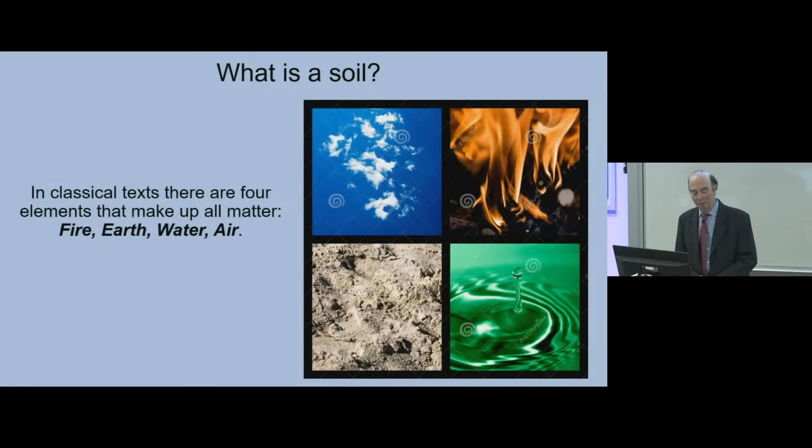In classic texts, there are four elements that make up all matter: fire, earth, water, and air. Fire: igneous rocks come from magma. Igneous is derived from the Latin word ignis, for fire. Magma is an ancient Greek word for thick unguent or paste. And ash is the remains of matter after fire — particularly relevant to mention today on Ash Wednesday.

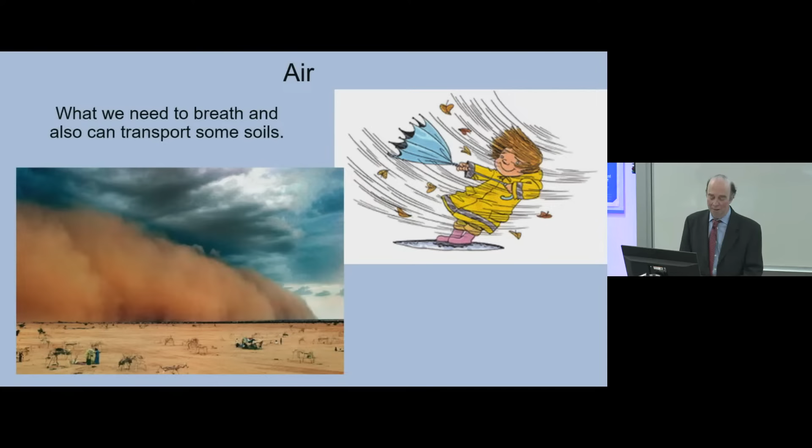Water: this is what we need to sustain us, and which can also weather and transport soils. Air: this is what we need to breathe, and it can also weather and transport the lighter soils. And the earth is the solid remains from the weathering of rocks and of ash in particular — many of our active clays come from the weathering of ash. So soils are derived from fire with the help of water and air.

Soils are particulate and potentially comprise three of the classical elements: earth, water, and air. This makes them very different to many civil engineering materials. Also, soils have three phases rather than just one. Two of these phases, the water and the air, readily intermix with each other, so understanding their behavior is challenging.

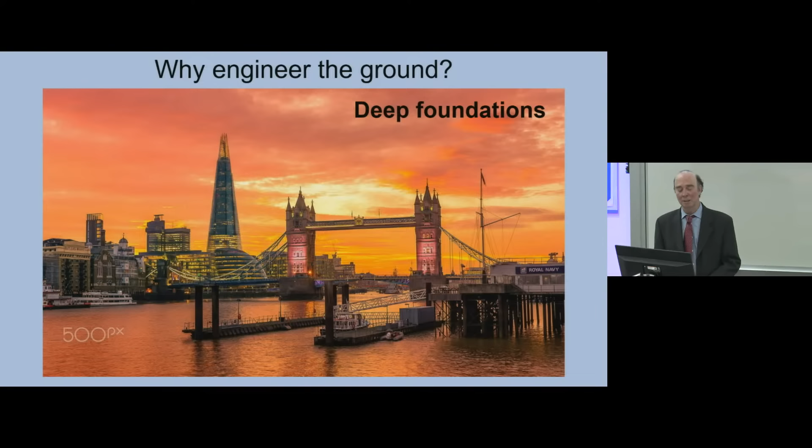Why engineer the ground? Here we see the Shard, Tower Bridge, the Tower Bridge piers, and a berthing jetty. They all sit on piles. For the Shard, they sit on very deep bored piles extending down to the Thanet Sands. The Tower Bridge piers probably sit on timber piles, and then we see these steel tubular piles driven in. We need to think about what capacity they need to take, how much they're going to move, etc.

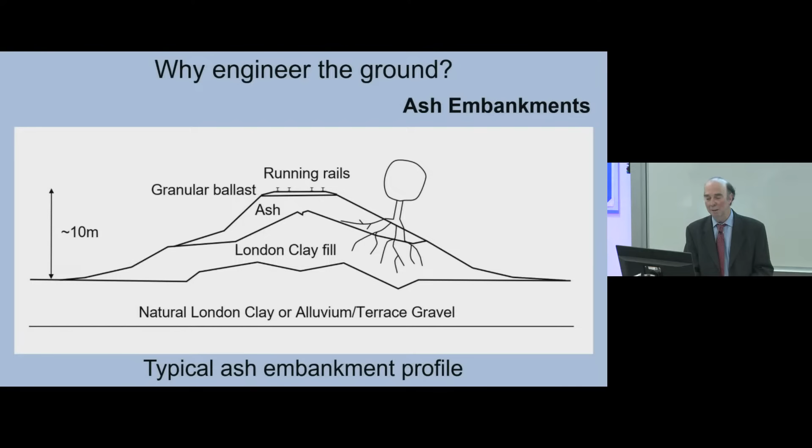One way used to remedy this, to keep the alignment - you don't want things moving if you've got trains running on them - was to top them up with locomotive ash. It's light, it's a waste material, and it's got good frictional properties, and it's free draining. I'll talk a bit more about that later.

Moving on to tailings dams, I was very fortunate to be part of a team with my eminent colleagues Michele Jamiolkowski, Kaare Høeg, and David Carrier, and before that Dick Chandler was there also. This is a picture of the dam that we worked on, the Żelazny Most Dam in Poland. It's 14 kilometers around its circumference, enormous, and about 70 meters high in places.

I very much enjoyed this work. I learned a lot from it, particularly with the interaction of my colleagues from Geoteco and KGHM, the mine people, and you see us here. Here we're about to descend about a kilometre from where the ore is extracted, and the photograph obviously taken from about a kilometre above. And then tunnelling.

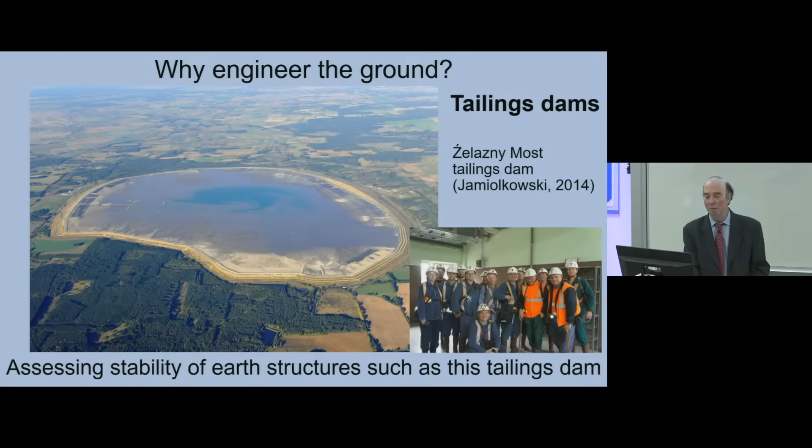And we continue actually with the piling theme. One of my current researchers, Clive Appleyard, is looking at the piles that were intercepted and cut into at the Bank Station upgrade.

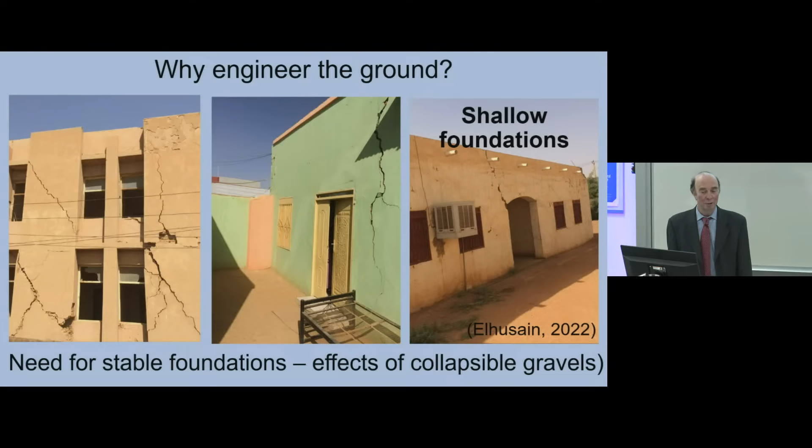Moving now to shallow foundations, equally important. You can see the damage that's been done to these structures. These structures are in an area close to Khartoum in Sudan, and my researcher, Dr. Louay Elhusain, did research looking at collapsible gravels. A few years earlier than that, Dr. Khalid Al-Haj, who I'm very pleased to see here also, did work on another Sudanese troublesome soil, a very expansive soil.

This is one of the deepest excavations in London. These are the running tunnels that went past and open up to station tunnels. All of this had to be done without excessive movements on Big Ben. It's a fantastic engineering feat.

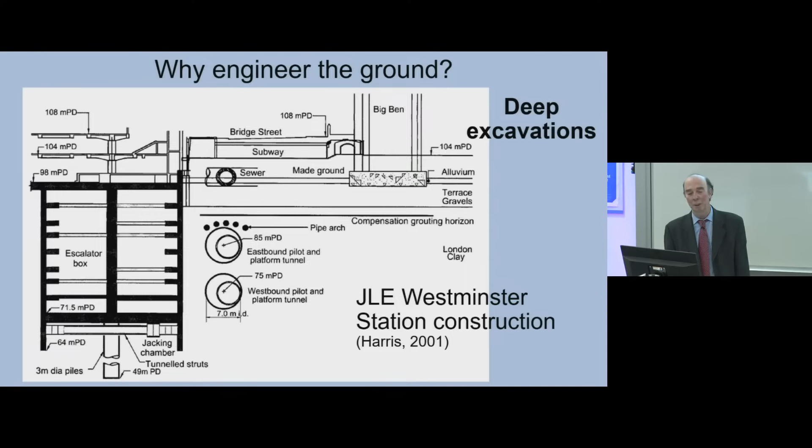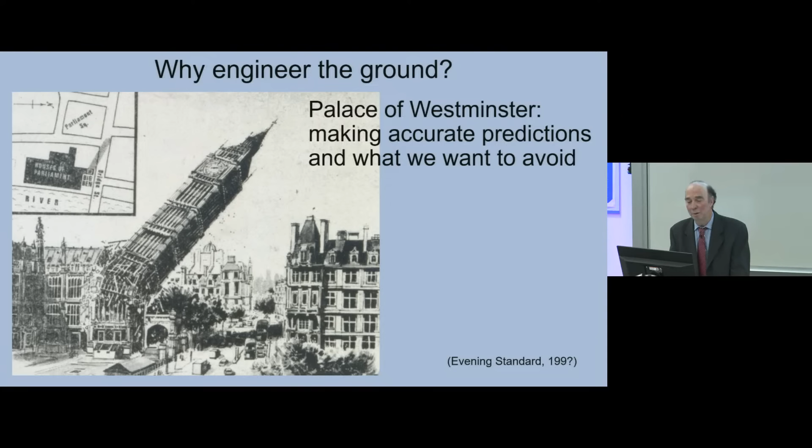This prediction was actually made by people at the Evening Standard, who clearly hadn't been on our MSc course.

So what do we need to think about? Well, in order to engineer the ground, we need to understand the materials that we're dealing with. We need to obtain an idea of what's in the ground through geological records and in situ investigations. And characterization often starts in the lab.

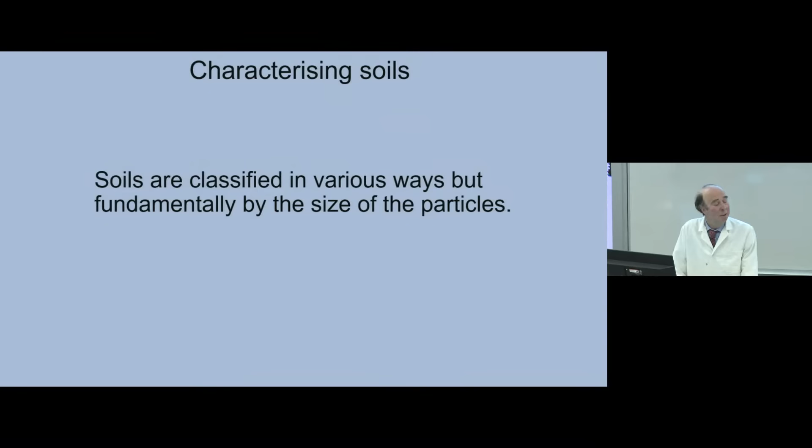And this is more my modus operandi, really. Soils are classified in various ways, but fundamentally by the size of the particles. What we've got lined up along the front here are nine beakers with these different materials in them. At the far end, on your right-hand side, we've got the coarse gravel, just one big lump. Gravel's in these - coarse, medium, fine. Then we've got the sands - coarse, medium, fine. We've got one silt, and we've got kaolin and montmorillonite.

They've got exactly the same mass - each of them has 100 grams of material in. And what you can see straight away is that some of them have completely different volumes to others.

So we see here, for example, the sands and the gravels all have roughly similar volume. By the way, I didn't measure them and estimate them in these beakers—I did measure them using a measuring cylinder beforehand.

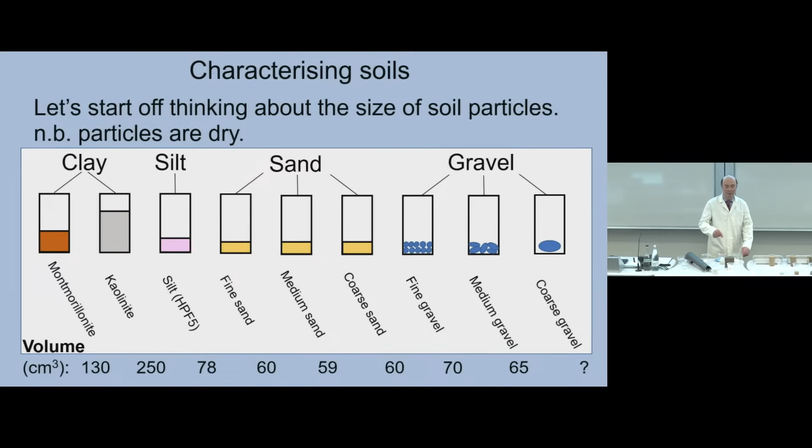The silt is a bit higher, but then we look at the kaolinite and the montmorillonite. Why are these bulking up so much? These materials are clay minerals and they have a net negative charge, so they're controlled by electrostatic forces rather than gravitational.

So all of these, you can definitely hear a granular sound—I won't do it with that one. And you might ask, why this one? This one actually is less active than this, and it's just to do with the grinding process.

So we've got these we would refer to as colloidal, and these we refer to as gravitational. The silt is somewhere in between—this particular silt probably on the gravitational side.

What do these fine materials look like? Well, we've got kaolinite and montmorillonite here, 10 microns here and 1 micron here. These are very small particles. Can you see the pointer? So often with these, we're talking about scales down to about 10 nanometers.

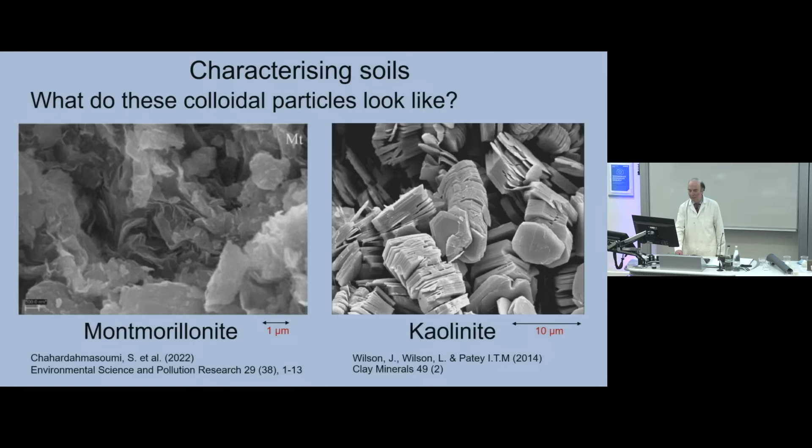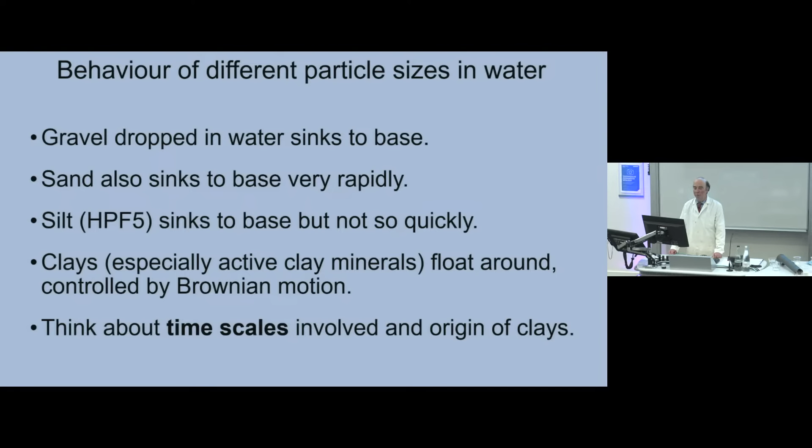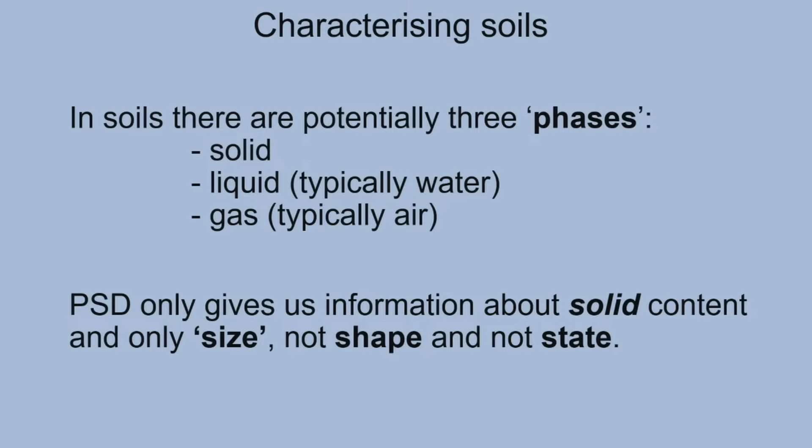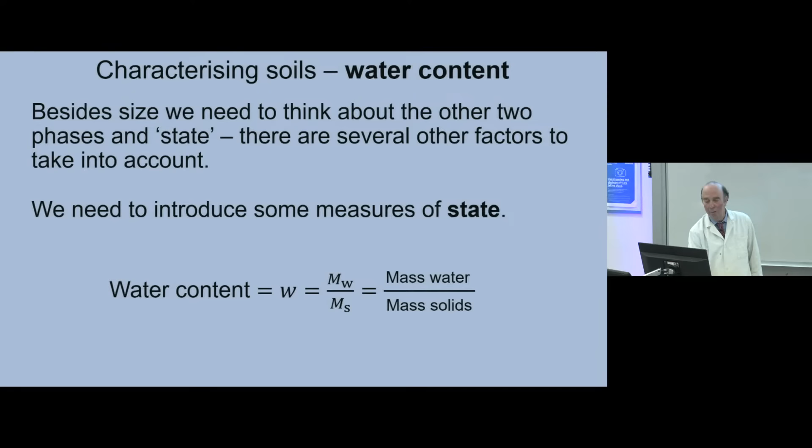There are several other factors to take into account, so we need to introduce some measures of state. The first one, perhaps the most fundamental, is water content—it's the mass of water over the mass of solids.

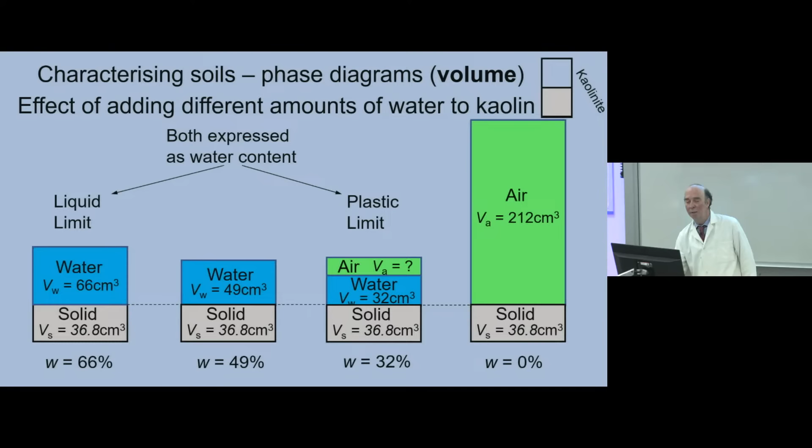These water contents are particularly chosen because they represent the liquid limit—if we wet it up any more, it essentially becomes a liquid—and the plastic limit—if you dry it out any further, the soil starts to crack and fall apart. What I've done is prepared 3 samples at those 3 water contents.

So here I've got the liquid limit—it's a bit like a yogurt. This one, dare I take it out... that's at the plastic limit, so you can just about shape it, and it's certainly got some air in it. And this one is quite sticky.

So 3 really quite different consistencies. This one has got some stiffness to it. This one has probably got very little strength, and the one in the middle is somewhere between.

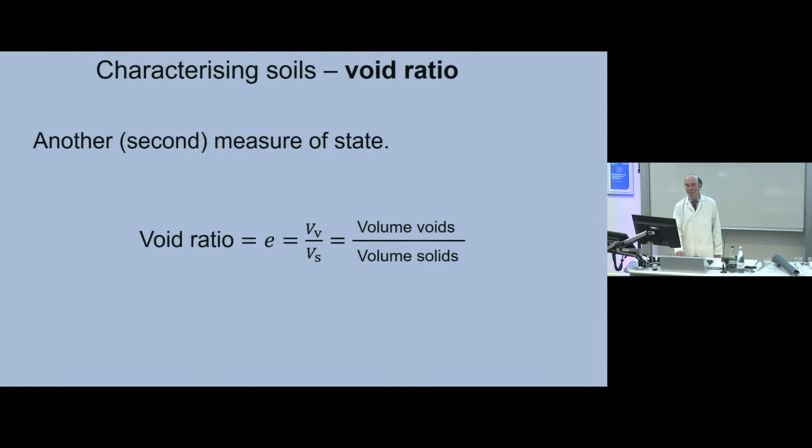Another measure of state is the void ratio, the volume of voids to the volume of solids. Here we again can see the differences. All of the sands and gravels have very similar void ratios, roughly. The silt's a bit higher, but then we come back to these two: the kaolin has 5 times more air than solids, and the montmorillonite about 2.5.

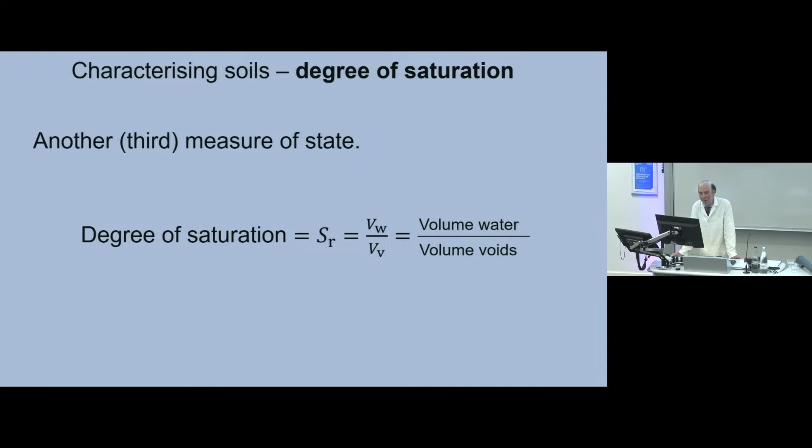Let's think about what happens as the soil dries out from a fully saturated state. We'll start at 100% and observe what happens as it reduces. The behavior of the granular and the colloidal is completely different, so let's look at them individually.

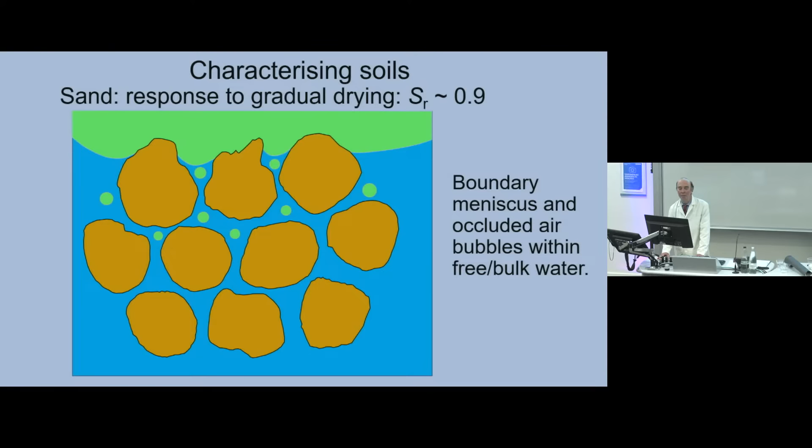Here we've got fully saturated sand particles, degree of saturation 1, and then as we start to dry it, we get a meniscus pulling in on the surface, and small occluded bubbles starting to come in. If we continue further, the meniscus pulls in further and the bubbles start joining up and coalescing, eventually sufficiently so that we've got continuous air phases and continuous water phases.

Eventually, the water dries out such that we've only got meniscus water and continuous air. If we dry further, we'll note that's at about a degree of saturation of 0.2 roughly. And then if we dry it out fully, in the case of a sand, it would dry to 0.

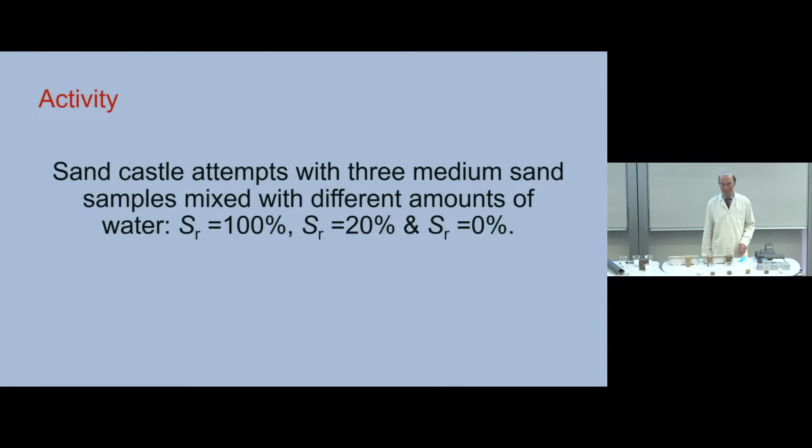So let's now have a look at the differences of these water contents and degrees of saturation. We've got three of the medium sands here: 100%, 20%, and dry. I hope these haven't dried out since I've mixed them up—there's always a risk. Let's try the fully saturated one first.

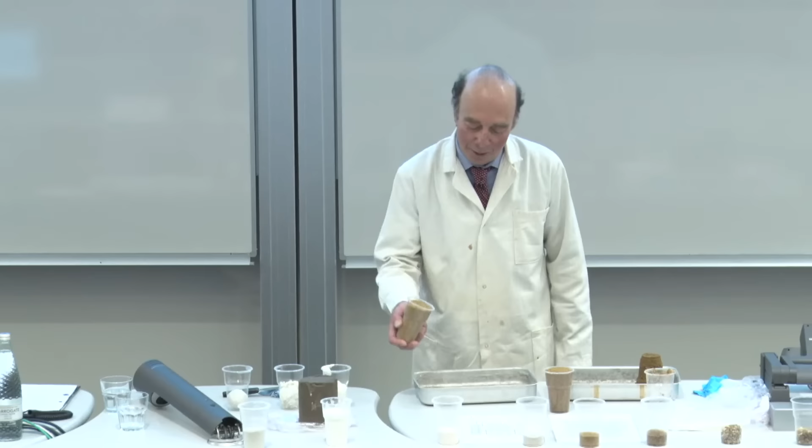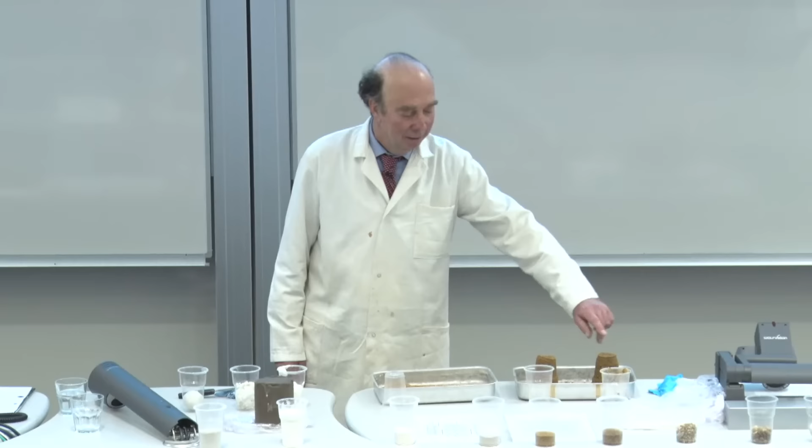Well, that one must have dried out a little bit, okay. Let's now try the dry one. Hopefully this one will be all right. That one, we've got a very poor heap, which reflects the angle of repose. And this was the one I was expecting to be more like that—it is, it's a better sandcastle, you've got to agree. But we see the difference, completely different. This, I would expect to slump a bit more, but there you go.

Let's move on to clays. So starting off with a fully saturated clay, the first thing to say with clay is that if we put the clay in water, because it has this net negative charge, it attracts cations from the surrounding water.

You have what we refer to as an adsorbed layer of water, right next to the surface of the particle, trying to counter this net negative valency. And then there's an absorbed water layer that you can't fully attract—there's not enough space on the particle surfaces to fully attract it. So we have these different types of water.

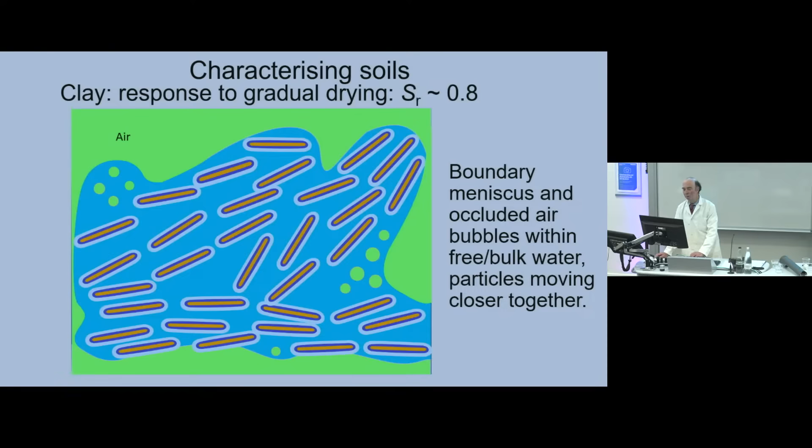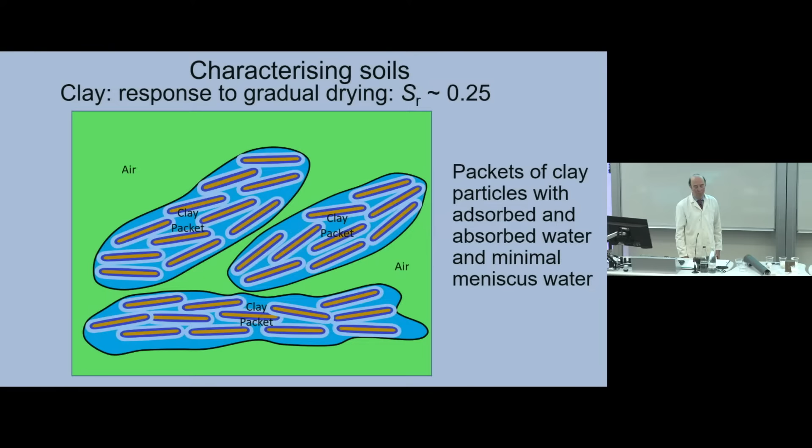Again, as it starts to dry, we get some occluded bubbles, but at much higher water contents. The boundary meniscus moves in, and the particles start grouping together to some degree, forming clay packets. Eventually, we have clay packets surrounded by and held together with menisci, and eventually the menisci go—so we've lost most of the bulk water. You can see we can't dry these out completely because that adsorbed water is held quite tightly by the clay particle charge.

So our phase diagrams actually take a series of steps as we desaturate here. In the case of clays, it's actually much more complicated. Usually we just express them with this simple diagram: air, water, and solid. But when we've got clays, we've got adsorbed, absorbed, as well as potentially meniscus water. And this is very significant.

If we compress this, so we squash the water out of it, eventually we squeeze out most of the bulk water, and we might start then impinging on that absorbed water. It also has very important implications if the water has any salinity in it. So, a former researcher, Dr...

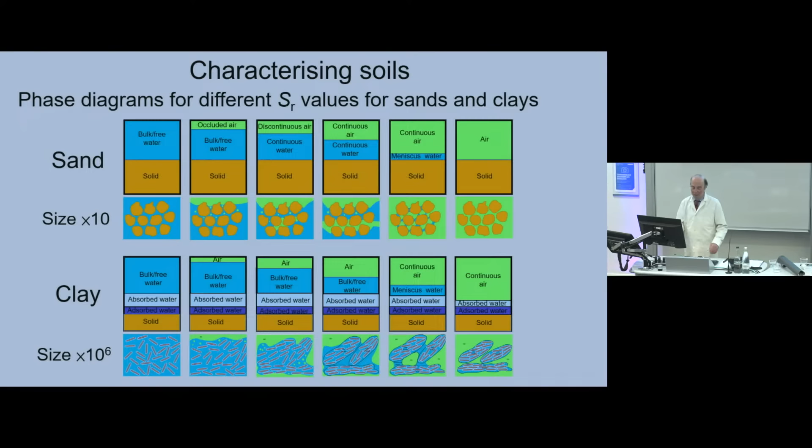Hendarto looked at water extraction in Jakarta, Indonesia. As the water was extracted, the water table came down over decades, and seawater started to come in. That salt water provided the cations that were needed. So the adsorbed water reduced, the void ratio reduced, but because there was more bulk water, the permeability increased - completely counterintuitive to start with.

So we've looked at some fundamental characteristics on a wide range of soils and the effects of air and water on them. How are these characteristics and states reflected in what we observe in the ground? The characteristics often remain the same, but the states vary enormously depending on the history of the soil.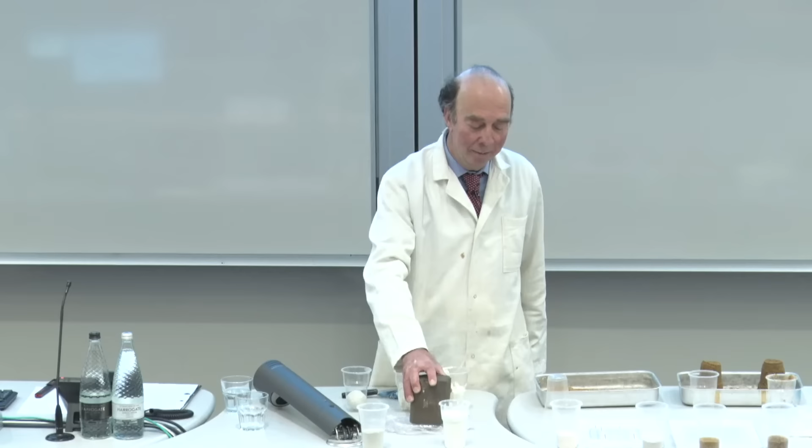Let's consider the London Clay Formation. Everyone knows I had to mention London Clay, didn't I? So this is a piece of London Clay, and it doesn't look anything like any of these. It's much denser, it's stiff - I can just about get my fingernail into it. And why is it so different?

Well, this material was formed about 55 million years ago. This is a slide from Dr. Chris King, who I was greatly privileged to work with on several occasions, along with Dr. Jackie Skipper. Chris did a phenomenal amount of work on the London Clay that many of us were not aware of until much later after he'd done it. This is work from the 1980s. At this time, 55 million years ago, a large part of southeast England was covered by the London Clay Sea, but the important thing is the shoreline was transgressing and regressing, so you get different depths of water.

Typically, these soils have a coarsening upwards gradient. We call this sequence stratigraphy. So Chris looked at the sequence stratigraphy, and he came up with 5 divisions, which are still used today, within the London Clay, which have quite different characteristics.

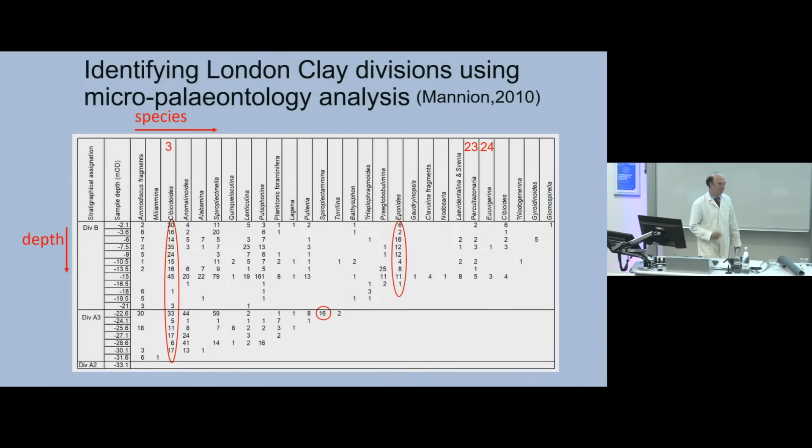The other way that he classified them was through the use of micropaleontology. You can see here a list of mostly unpronounceable names, varying with depth. Some of these little creatures, these microfauna, lived at different times and are evident at different depths. So here, this Cibicidoides existed through all of division B and A3, whereas this one - I'm not going to try and pronounce it - only occurred at that one time.

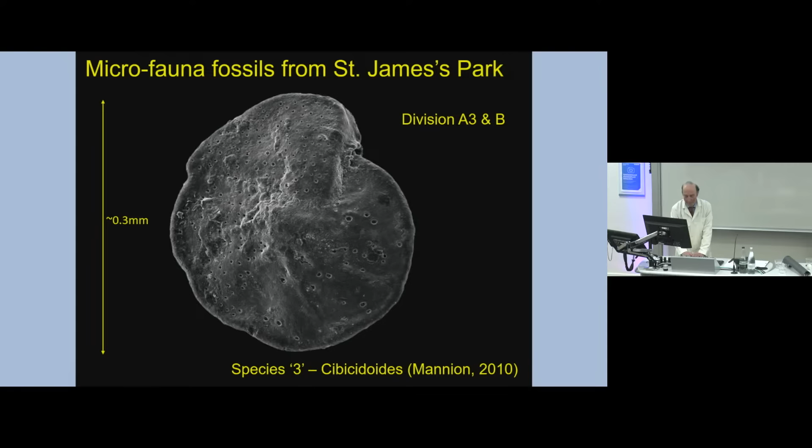So this is the Cibicidoides one, the one that pops up everywhere - looks like a bit of rotten pancake from yesterday, doesn't it really? This one, I'm not going to try and pronounce, but just to show you what it looks like - it just amazes me that you can find things like that in a lump like this.

This is Will Mannion's work, along with Dr. Mike de Freitas - very happy to see you here tonight, Mike. And this is another one - again, I'm not going to try and pronounce it, and I might cause some offence if I try, I think.

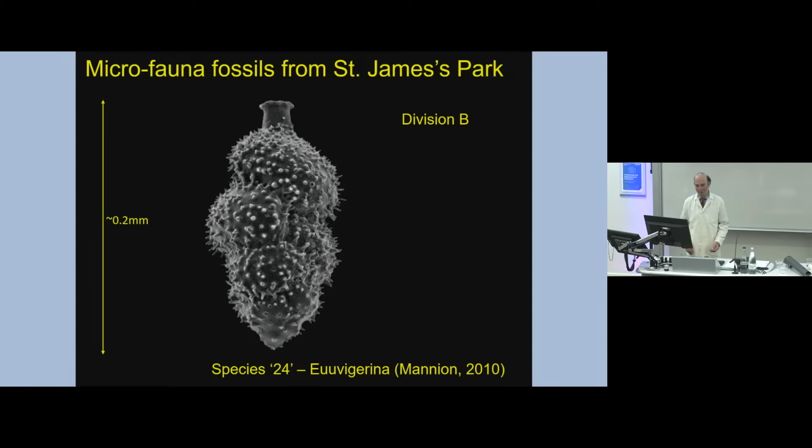So we talked about the 4 elements. Besides the 4 elements, we have a 5th one that is often the case in soil mechanics - that's the element of time. So let's investigate some in situ soil states and also how the ground responds to engineering activities. Let's go on to field characterization and monitoring.

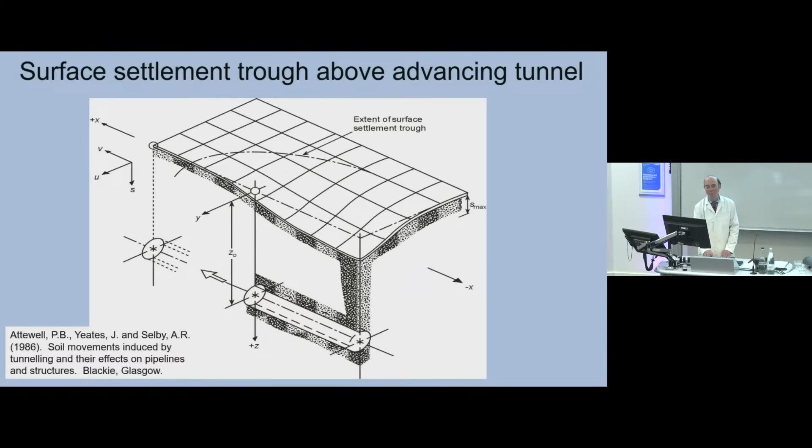Right. Many of you will probably recognise me in this attire, so we need to get ready now.

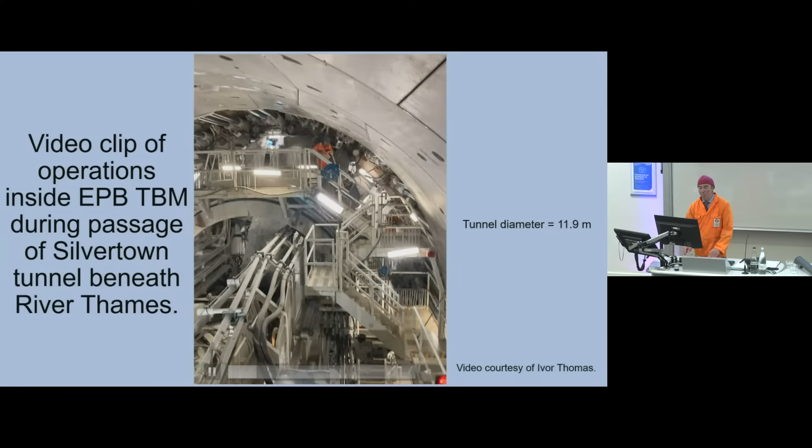So you saw the clip, thank you very much Ivor, of a TBM. Let me talk through it briefly. Here you can see the spoil coming out, swiveling around. This is the Archimedes screw where the spoil comes from. You can see the lining, looks beautifully constructed. You can get a feel for the scale of the thing. The cutter head is hidden in the front here, and all of this, including the lining erection, is being controlled by a very small number of people.

Right, I want to start off at St James's Park. This is one of the sites we used as a control for the Jubilee Line extension works. This is work from Dr. Rob Nyren, and Rob, I think you're listening in - you'll be amazed at how often your name gets mentioned.

The driller who installed the instruments - I bumped into him a few years later and he said, 'Oh, what happened at St James's Park?' And I said, we got 20 mil of movement. He said, 'God, I could have done that with my heel.'

But the significant thing about this is that the volume loss was 3.3%. Now, that number may not mean much, but all the calculations for predicting how much the ground would move assumed it would be 2% at the maximum. So this was a significant excess over that, and we also noticed we had these very large volume losses.

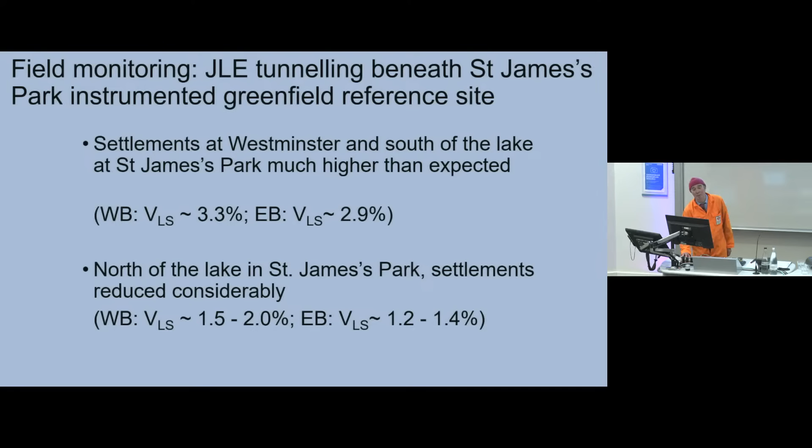This is for the first tunnel, this is for the second. But north of the lake, they were much more what we would expect. As a consequence, and to try to get a better understanding, we drilled 5 sets of boreholes to look into this. We knew the tunnelling had some influence based on how they were operating, but we wanted to check the ground conditions. So here's our St James's Park site.

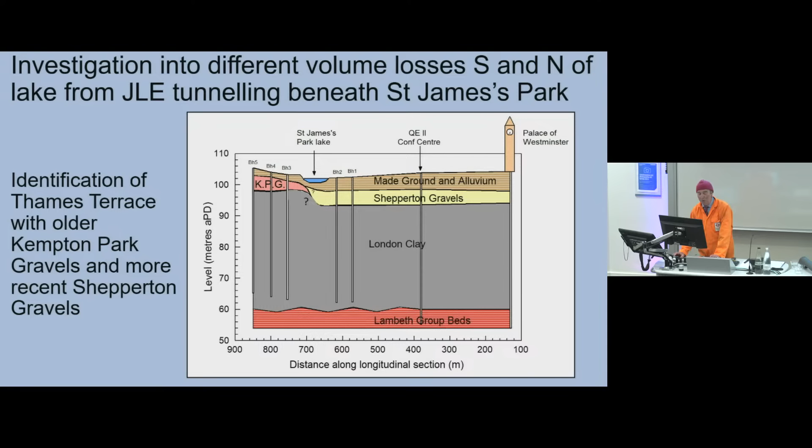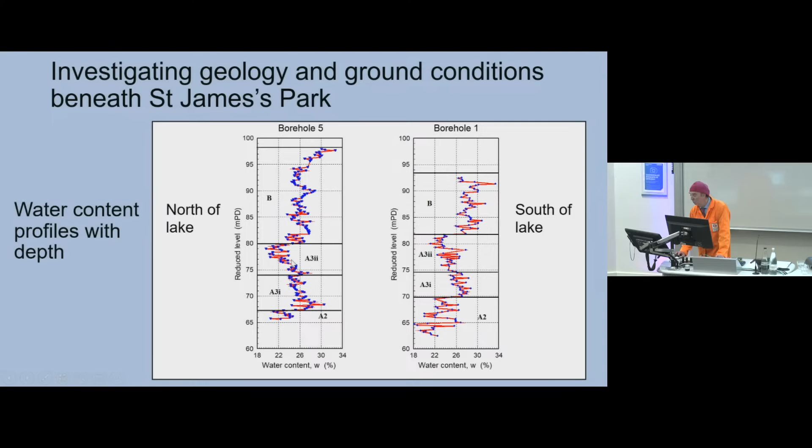We asked Chris King to come - it was the first time I met him - to look at those cores. He walked up and down, you could see them all laid out, and he said, that's where Division B finishes, that's where Division A3 starts. And they corresponded exactly with the breaks I'd made here, which was really one of the most satisfying things I've had. This division here I put in because you'll see why in a moment.

So we've now got this stratigraphy within the London Clay Formation. This is the B division, the upper one - if you get your eye in, you can see the fissures there. Directly beneath this is division A3ii, this is the one with the siltons. This one has silt and sand partings, very important in terms of permeability. So this is why I split this up.

If we look beneath it, we see that it's faintly laminated, but no silt and sand. Then division A2 is a mix - at the top it's bioturbated, been chewed up by worms, and further down into beds of sands and clays.

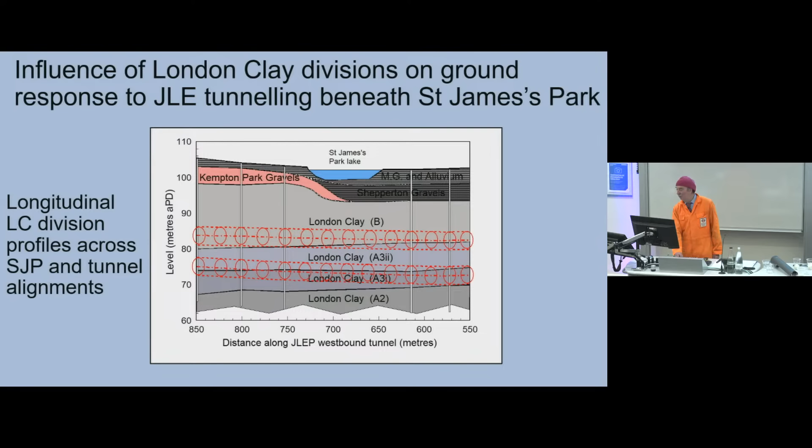So now let's superpose the tunnel alignments. We see the first tunnel coming through here - it's got its crown in that A3ii, the one with the silt and sand partings, but as it comes up here, it's coming out of it. Equally, the second tunnel's got its invert and axis almost in it, but by the time it gets to the other side, it's coming out. So those tunnels would have been affected by that substratum.

Another amazing thing to me was that during the drilling works, I asked the drillers to make a note of the water strikes, and you see them here. They correspond exactly with this A3ii. And the driller on the south had all sorts of problems with the stability of his borehole.

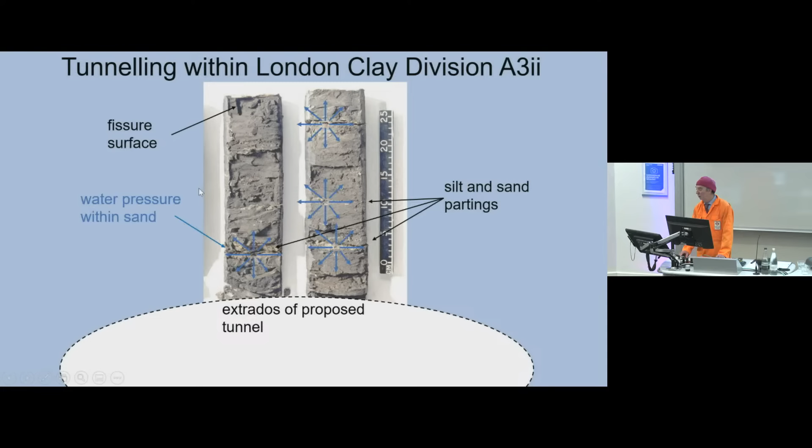So immediately that should tell you that there's something awry. I've put this little schematic together - here's our silt and sand partings, there's fissures there as well. We know they're under pressure from the water strikes. If we then relieve the stress from the tunnelling, the ground moves in - there's much more blocky movement.

Talking of fissures, I just wanted to mention fissuring in London clay. This is work that was done by Skempton in the late 1960s, but just to show you what it looks like - it's pretty much sub-vertical.

I also wanted to mention some work that I did when I was an undergraduate with Robert Craig - very honoured to have worked with him also - looking at fissures in Errol clay.

Let's move on to Crossrail. A lot of this work is from Michael Wan - I'm very glad to see you, Dr. Michael Wan, here. We know the Crossrail alignment, so this is where our site was, and more specifically the Crossrail tunnels came in through here. We had our instrumented site in here.

What we were particularly interested in is the effect of tunnelling on existing tunnels - these are the Central Line tunnels. So here's the Crossrail tunnels, here are the Central Line tunnels, all in London clay.

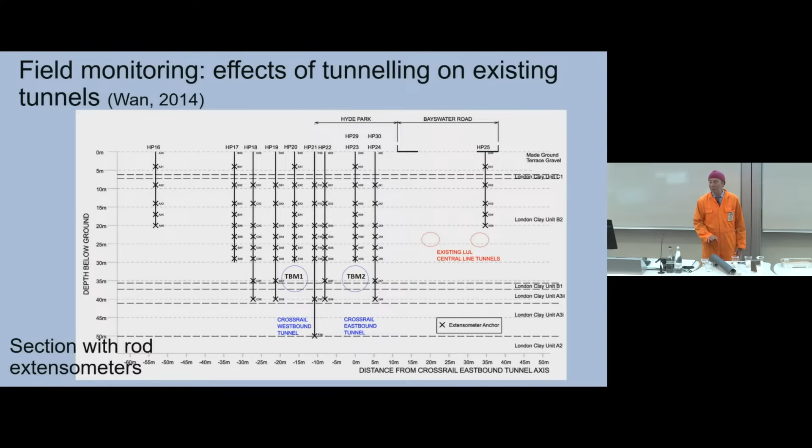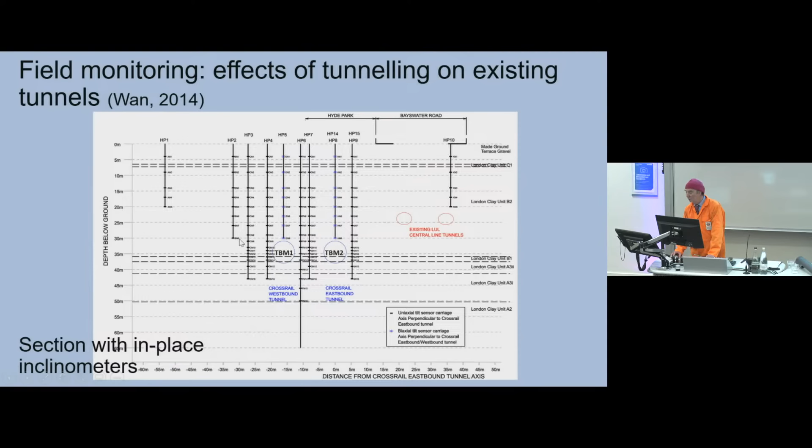In this section, one of the things I want to mention is that making these measurements, we need to make holes in the ground. We've got discrete holes, anchors at different positions, and we need to tie all of this together - it's not easy work even making the holes and getting accurate measurements. All the crosses here are points where we've got anchors for measuring vertical displacements. These are where we've got devices for measuring rotations that we integrate to form horizontal displacements. And here we've got piezometers.

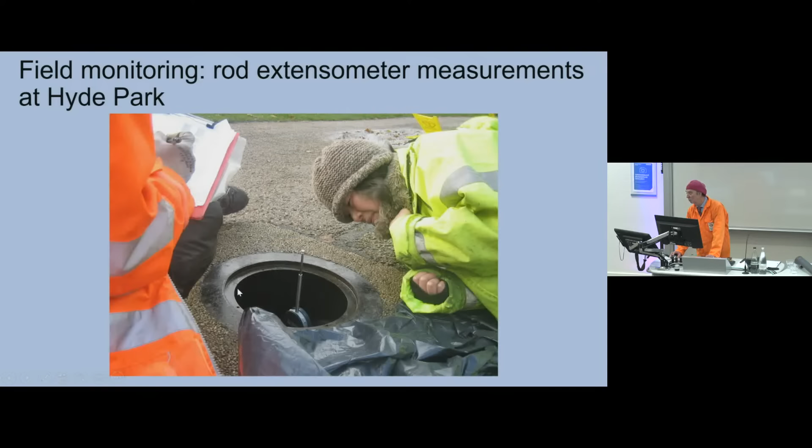This is the sort of work we're doing - we're out in the field surveying. These are good weather shots; we don't take pictures when it's pouring with rain. Equally, this is taking measurements with Dr. Jessica Yu and Dr. Weiwei Sim, taking measurements on the extensometers. Again, it's nice and dry and sunny.

Let's also think about these tunnels - huge tunnel machines. We were interested in the effect of driving that underneath the existing Central Line tunnel. So with our colleagues from ETH Zurich under Professor Sasha Puzrin, we installed fibre optics. We installed our own instrumentation - this is Duncan Parker, who was a great team member, putting in strain gauges.

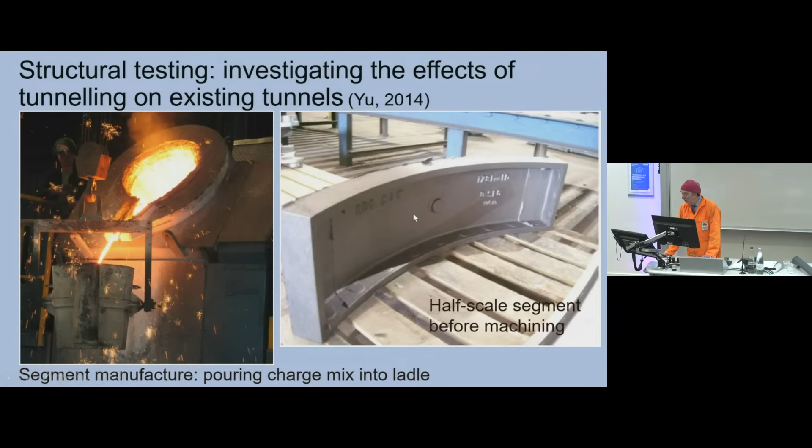We also wanted to try to understand the behaviour of those segmental linings - very complicated because they've got joints within them, so they articulate. So we had specially cast grey cast iron segments manufactured using a Victorian recipe, and we put them together. This is Dr. Jessica Yu's work - here's the ring, this is a reaction beam, and these are all actuators. We're controlling this using load and using displacements.

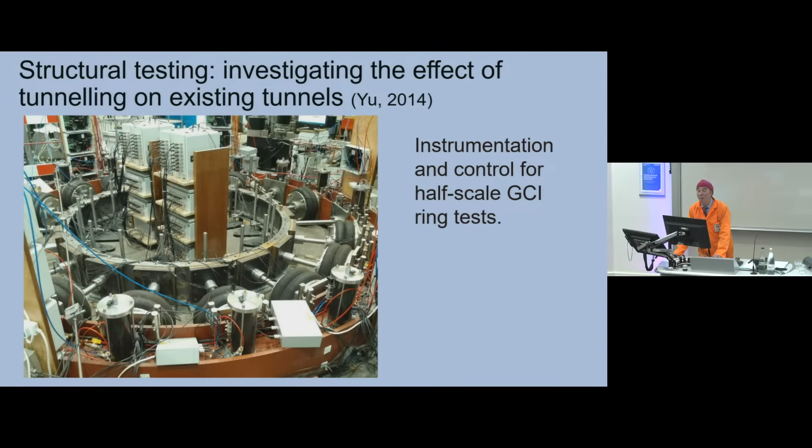We did all of this - it all came from scratch, it was all designed by us, and it worked. We got fantastic data from this. So it was Jess, and then later Dr. Shada Ashfan continued that work as well. At the time, Dr. Katerina Tsiampousi was modelling this using ICFEP, and that work has now continued recently with Dr. Agustin Ruiz-Lopez. So this work continues, with the data from this being used extensively.

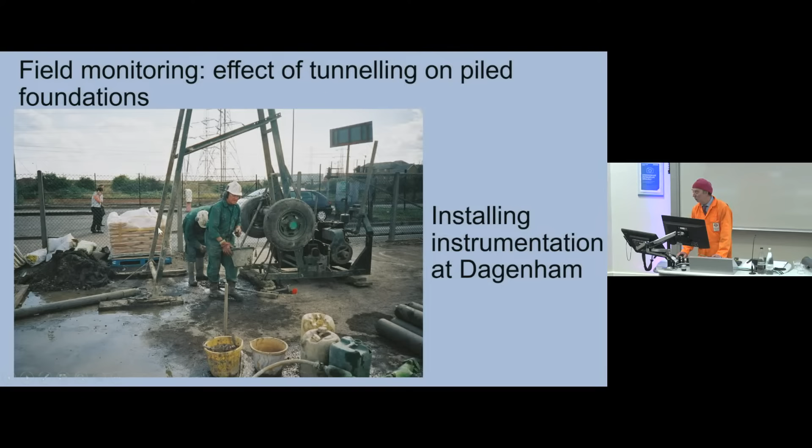Going back to Demetrius's site, this is Sunny Dagenham, and these 4 blocks of concrete are loading those piles. Here again, just the instruments that were put in, not as comprehensive as Hyde Park, but this is the sort of thing we're talking about. Drilling holes, you can see part of the spoil here, the grout - it's all needed, and it needs to be done carefully.

Work that I did with Professor Richard Jardine - Richard, thank you - and this was along with Eric Parker from D'Appolonia. It was Eric's idea to look at these jet grouted piles, so have a pile and create a great big jet grout bowl beneath it.

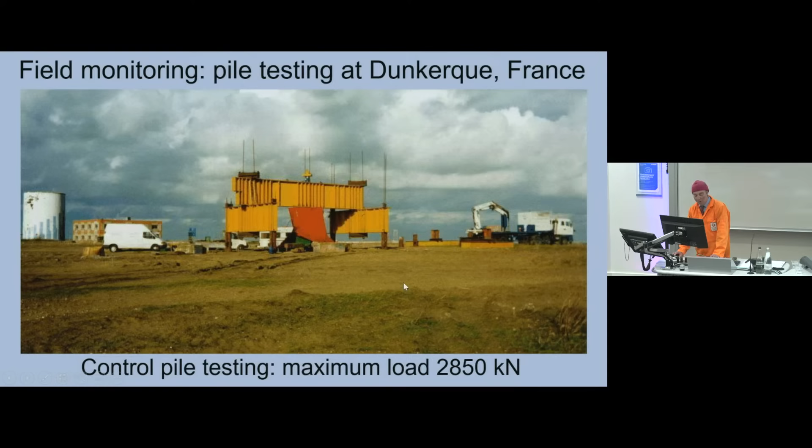We also used the opportunity, with Richard's wisdom, of looking at cyclic loading and the effects of time on driven pile resistance. This followed on from Dr. Fiona Chow's work a year or so earlier. So these are the setups for testing these piles. This is the control pile, massive beams loading up to 285 tonnes, and an even stronger arrangement for the jet grouted pile, reaching just over 500 tonnes to fail this pile.

Right, so just another little detour.

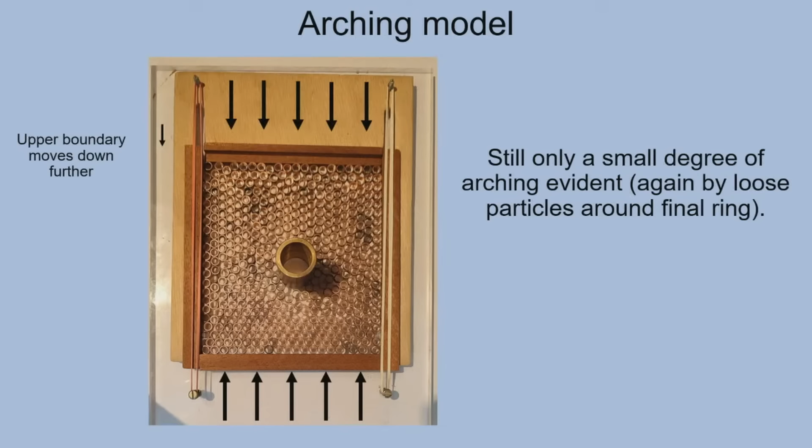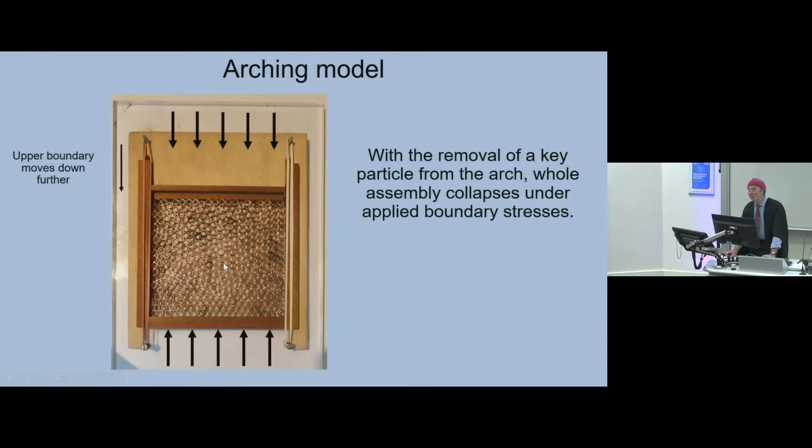What I wanted to show here was this phenomenon of arching. So I've got a stressed set of little pseudo particles, and first took those concentric circles out and then started picking them out. We can see here we've got arching taking place. And then I took out a key piece and it all collapsed.

Right, let's now get on to the fourth part. An important thing to say is the interaction between the groups within our section - we've got the lab, the numerical, and the field, and we all feed into each other. I want to mention a particularly interesting case, I think - oops, forgot about that.

This is talking about gas blowouts during the ground investigation for Thames Tideway. This was connected with Dr. Tim Newman's work. They had blowouts on at least a couple of rigs, and massive blowouts. The gas, moreover, was found to be anoxic, and that was Tim's remit, to look to find out why - you can ask Tim about that.

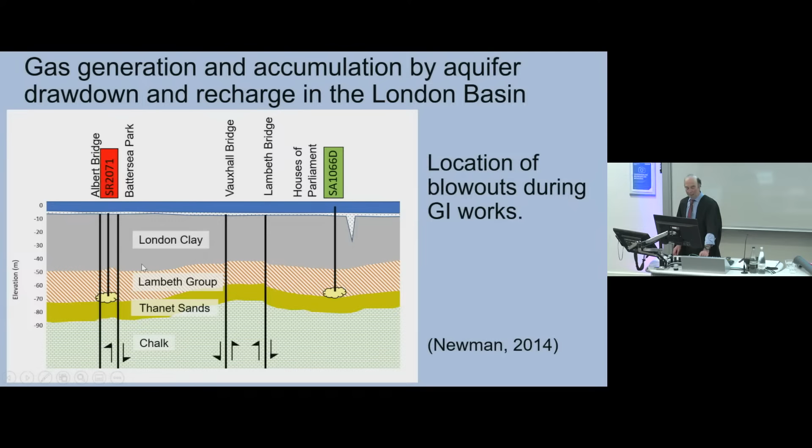And where did these blowouts occur? They occurred at the base of the Lambeth group. The base of the Lambeth group is granular, the Thanet Sands obviously granular, and then there's impermeable material above. And why should that gas be there?

Well, if we look at the London Basin from about 200 years ago, it's fed with water from the North Downs and the Chiltern Hills, and in the 1800s the water was artesian. So when they put up Nelson's Column, all the fountains there were powered by artesian water. Then during the 19th and 20th century, there was a lot of water extraction from light industry. It dropped down into the Thanet Sands, so those Thanet Sands would have desaturated, and gas would have formed within them.

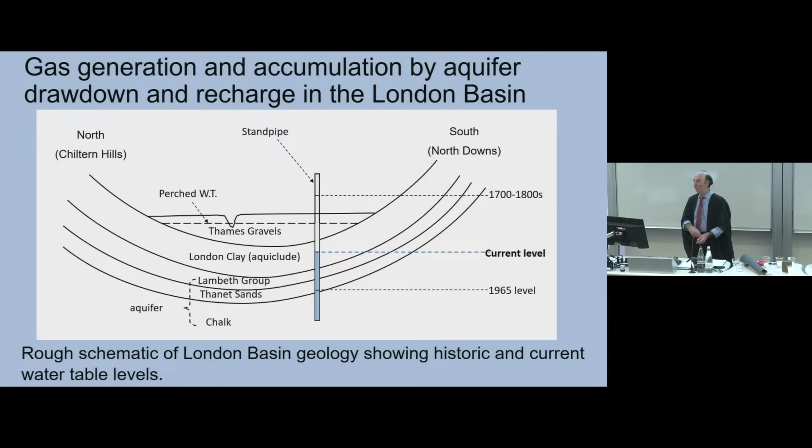If we go back to these water retention curves, this would have happened very readily. In the clay, it can sustain much higher suctions before cavitating. So when the water started rising again, which it did after the industry started moving out of London, that gas would have been trapped underneath the impermeable layers of the Lambeth group and the London clay. As the water moved up, the gas would have gone under pressure, and then you penetrate it, you release that gas, and you get the blowout that we saw.

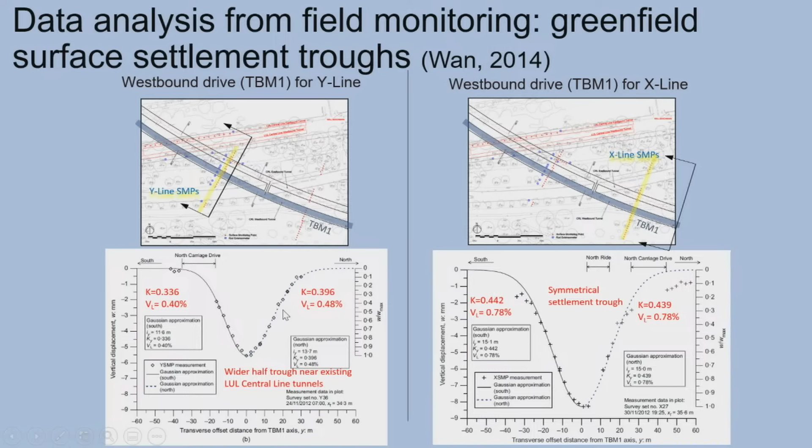So it allows us to understand the mechanisms of the tunnel boring machine very well.

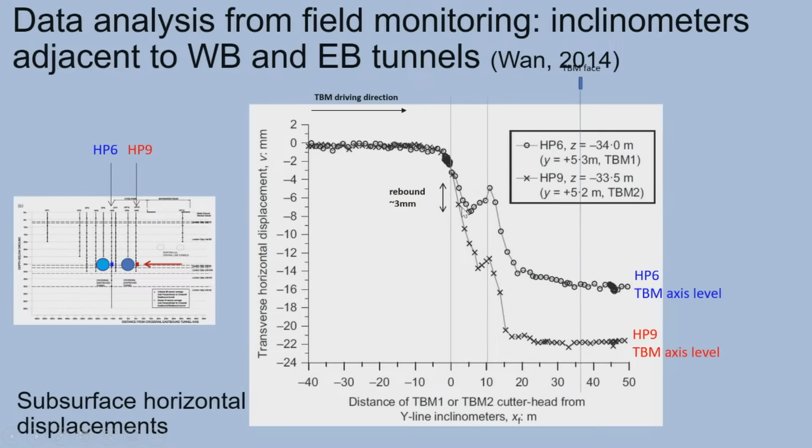If we now take these two inclinometers, either side of those two boreholes, we can see a drop in movement followed by a rise and then a drop again for both tunnels. As the cutter head approaches, it starts moving in towards the tunnel, then it moves in, moves back out again, before moving in once more. So these are complex mechanisms of movement.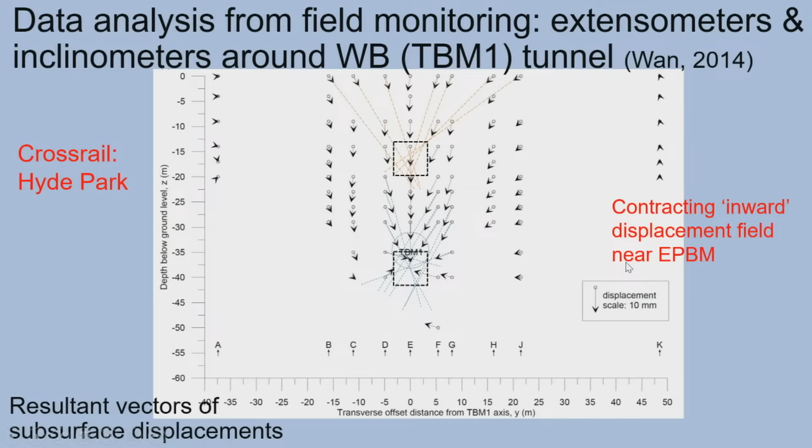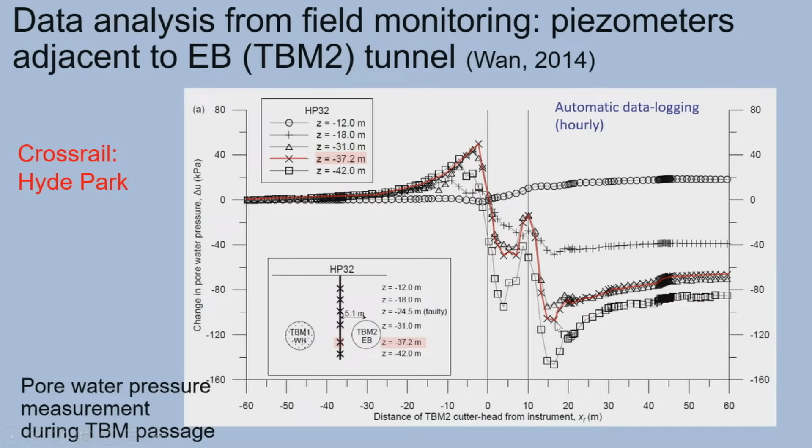Let's look at the piezometers now. Very interesting responses that you can link up with the tunnel progress. As the tunnel comes in, let's look at this one just below the tunnel axis. We get an increase followed by a decrease: increase as the tunnel approaches, then a decrease as it goes past the cutter head, then an increase from the tail skin grouting, and then another decrease as it comes out the tail skin. So we can characterize these in terms of pressure rises and pressure drops.

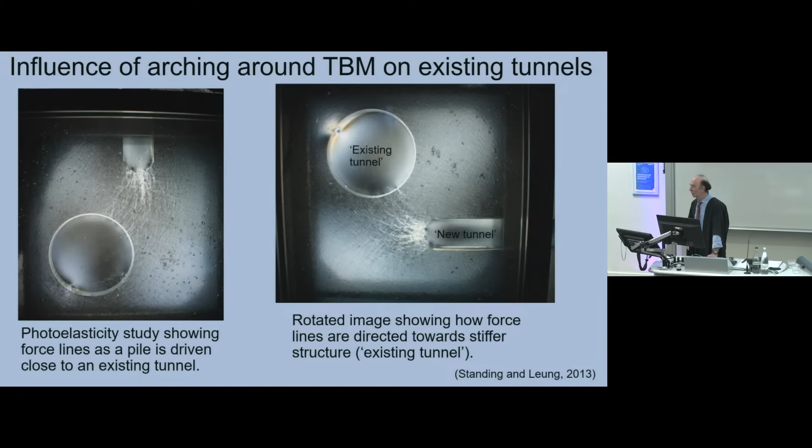This is work I did with Teresa Leung many years ago, looking at this photoelasticity image. As we push a pile in, you see these light force chains, and if I rotate it 90 degrees, we can see they're attracted to the stiffer tunnel. So if we've got arching, we've got these lines of thrust, and they can interact with the tunnel and deform it.

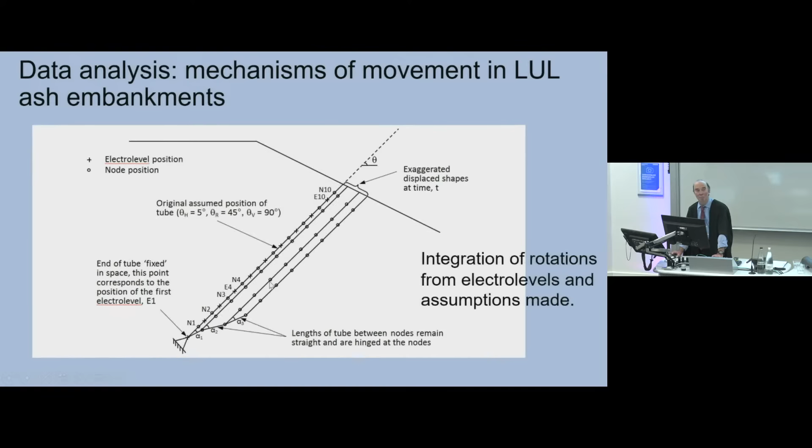Ash embankments, this is the last one. These are the points we put in. Many assumptions need to be made to interpret the data from these, and these are the sort of results that we get. If you'd seen all the mud and the foam and all the aggravation we had putting these in, especially with the grouts, these are the plots that we get. Very, very instructive, and we can then put things together to understand the mechanisms of movement.

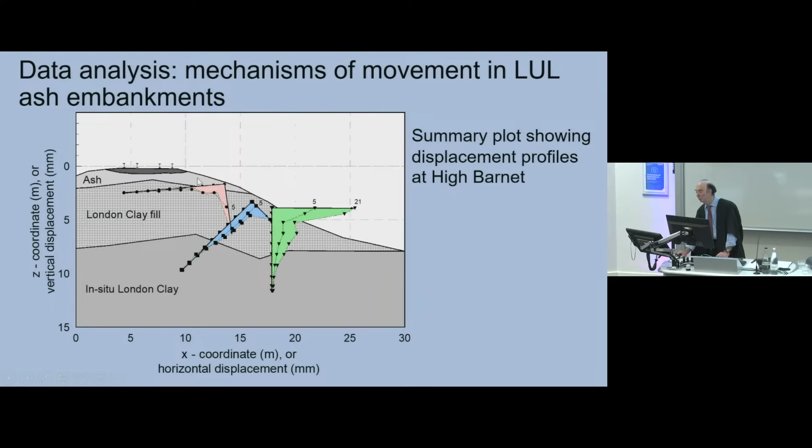There were two sites. This is the High Barnet one, there wasn't much ash. This is one at Roding Valley where there were very great thicknesses of ash and much greater movements. From these, we were able to interpret and determine how the ground moves at different times of the year, expressed here as soil moisture deficit. So in the winter, you've got menisci forces holding the particles.

These soften up. In the summer, the meniscus forces disappear. They run down, especially with the train vibration. These shrink, but they move down. So you get spreading of the embankments.

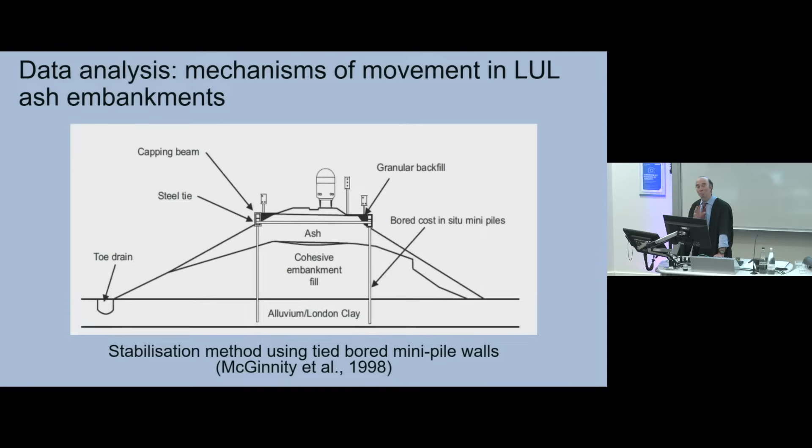And this is one of the remedial measures that London Underground implemented to prevent this movement, because those movements cost—I don't know how much—but every year they had thousands of tons of ballast inserted to maintain the track alignment.

I'm going to finish with long-term movements, back to St James's Park. This is work that's been ongoing for a while, but this is work that Hun Young has been helping with since her fourth year project. Very glad that you're here now doing research with us. And these are the extensometers at St James's Park.

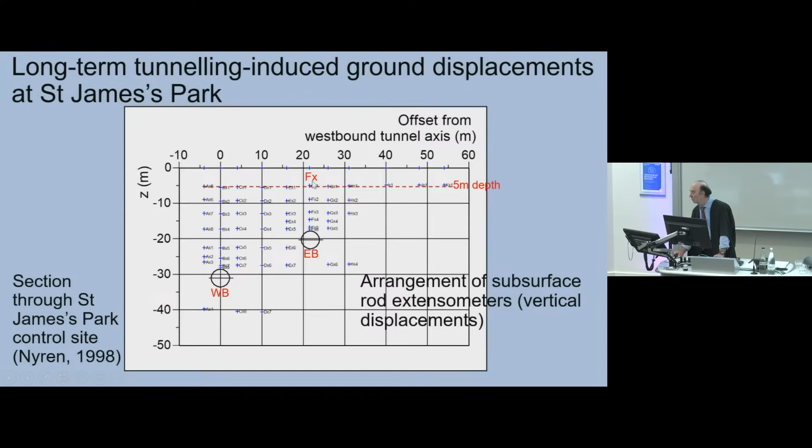I'm going to show you profiles from this section here, not the ground surface, because the ground surface is affected by trees, vegetation, etc. And I'm going to look at this position FX, this extensometer FX.

This site is about 100 yards from the Treasury. We all know we won't make any comments about that.

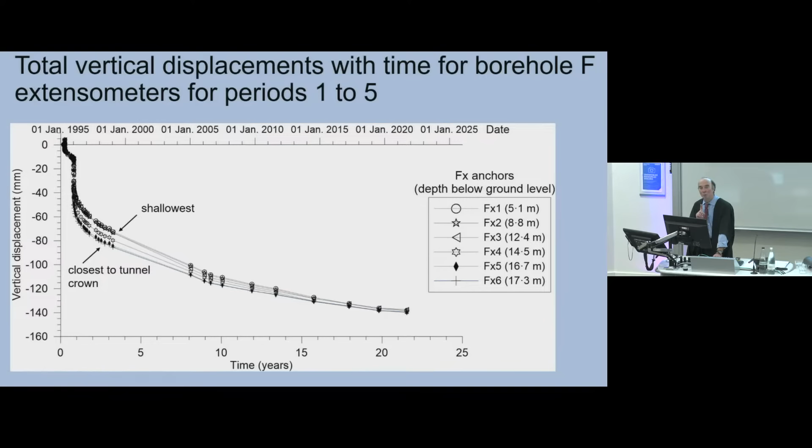So again, just to emphasise the importance of these interrelations, identifying future challenges in ground response. So permeability is very difficult to measure, and this is something that many of us are very interested in trying to pin down better. Fissures have a big influence on this.

And I'm working on fissuring and actually bulk modulus with Jaime Wilsanin, who's here with us, one of our current researchers, and creep. Those movements at St James's Park, they're not just from dissipation of excess pore pressures, there must be an element of creep in there as well.

And then, of course, there's unsaturated soil behaviour, and there's thermal behaviour, and we're working on these together. I want to mention Vasilis Mantikos, who's here tonight. Vasilis did a lot of work on unsaturated soil behaviour in relation to using it as nuclear buffers for the storage of nuclear waste.

So hopefully from this, you've gained some insights into ground engineering. Hopefully you've learned some fundamentals of soils, even if not all the tests went right. Hopefully you realise the need to characterise in the field and monitor ground response to understand the responses. And I hope you understand the care that's needed to translate all aspects of the field work, the installation, the monitoring, the construction activities, to turn all of this into meaningful graphs and observations.

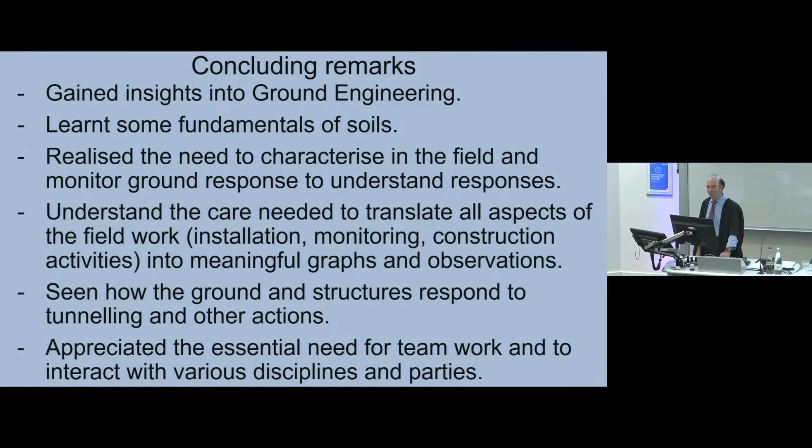And I hope you've seen how the ground and structures respond to tunnelling and other actions, and appreciated the essential need for teamwork and to interact with various disciplines and parties.

Final thought, reflection on time elements. You know I like talking about orders of magnitude. Speed of light, 300 times 10 to the 6 metres per second. Speed of sound, 343 metres per second.

What about rates of flow of water through fully saturated soils? Through granular soils, typically 10 to the minus 3, 10 to the minus 5. Clay soils, 10 to the minus 8, 10 to the minus 12. That's saturated. Unsaturated can be down to 10 to the minus 20. So we've got not just orders of magnitude changes, we've got orders of magnitude changing here.

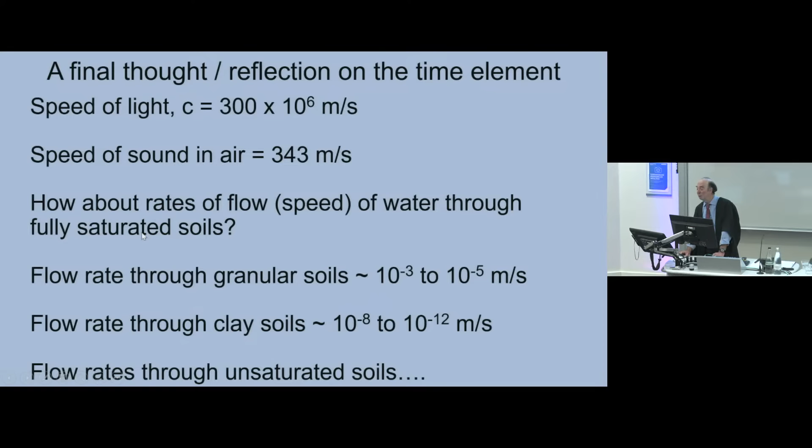Us geotechnical engineers tend to be a little bit on the slow side when things are moving along. But we do appreciate the need to stay saturated. And when the bar opens, we move at the speed of light.